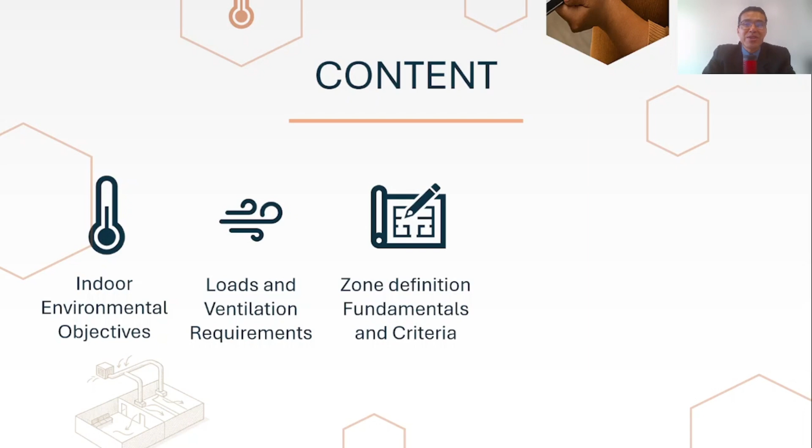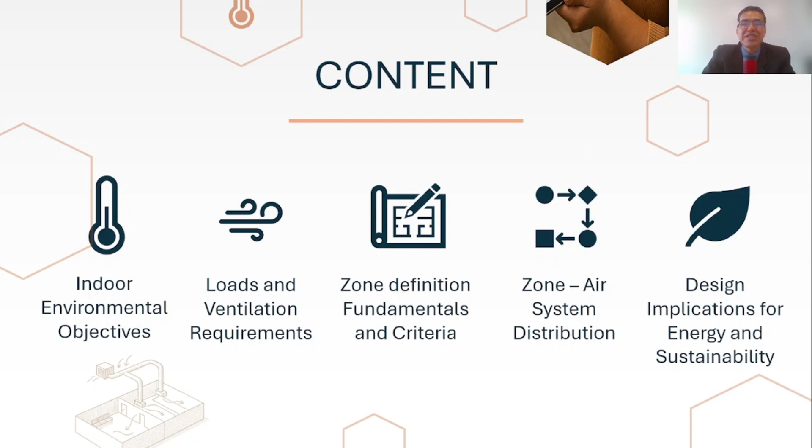Then we connect zones to system behaviors such as constant volume and variable air volume control at a conceptual level. And finally, we tie these choices to energy and sustainability outcomes that matter in practice. The learning objectives. By the end of this video, you should be able to state why HVAC systems exist and how zone definition supports both comfort and indoor air quality.

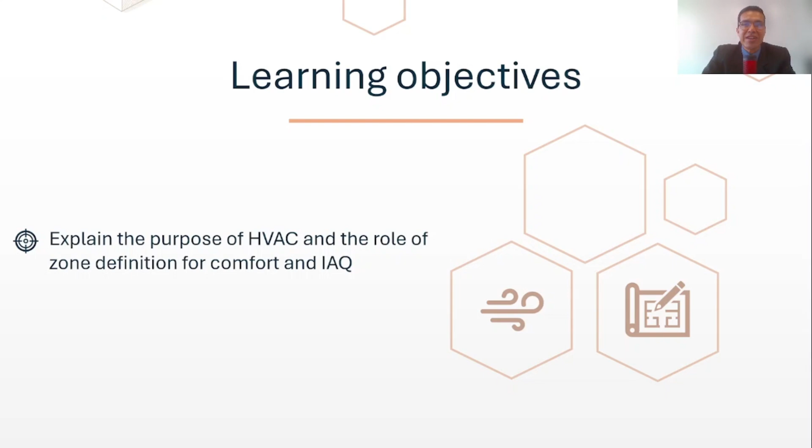Let's start with a question. Imagine that you are handed a design that says a single air handler with one thermostat serving an entire floor that has rooms with different uses. What mismatches might emerge between what the system delivers and what different spaces actually need? Take a moment to picture three distinct areas: an open office with variable occupancy, enclosed meeting rooms with short high-density events, and a print or copy area with process heat and emissions.

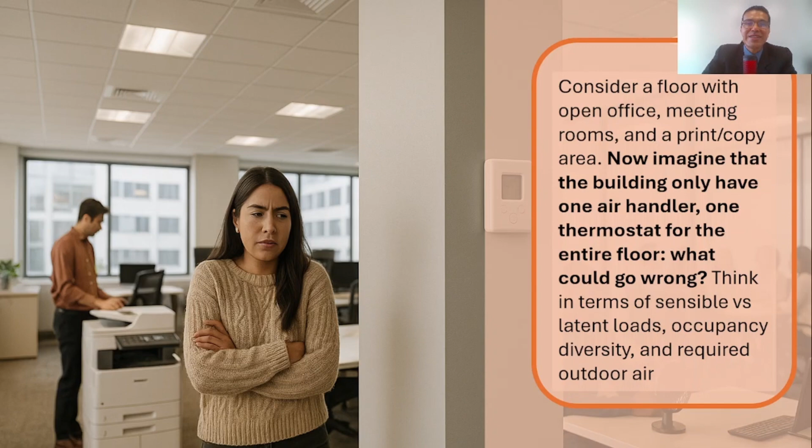If one control point is expected to keep all these areas comfortable, what happens when the conference room fills up while the open office empties? What happens to humidity control when the print area adds latent loads? As you think this through, separate sensible and latent effects, and remember that outdoor air is introduced for indoor air quality, not just temperature control. How should this diversity influence the performance of the air handler for the whole floor? Keep your answers in mind.

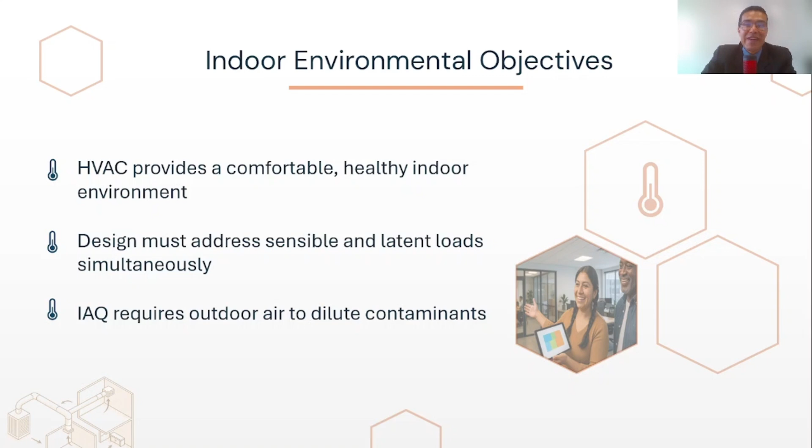So let's start with indoor environmental objectives. The primary purpose of HVAC is to create indoor conditions that are comfortable for occupants and supportive of health. This requires offsetting both sensible loads associated with temperature change and latent loads associated with moisture removal or addition under expected operating conditions. In parallel, outdoor air is supplied to maintain indoor air quality by diluting contaminants from people and processes. The system must therefore condition and distribute air to satisfy both thermal and indoor air quality objectives.

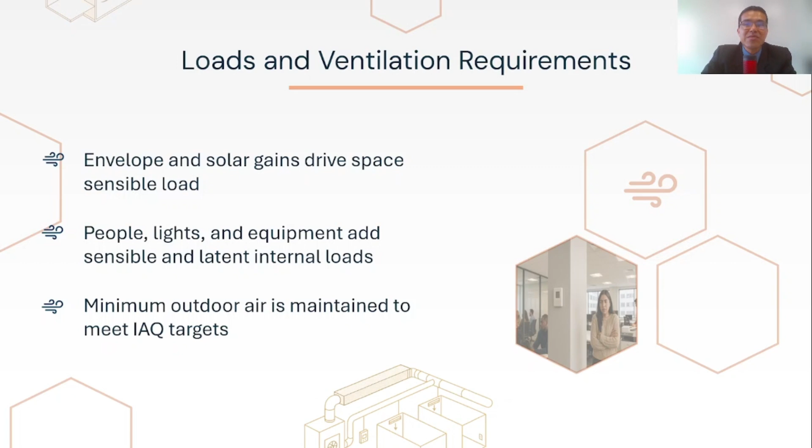Then let's talk about loads and ventilation requirements. Building envelope characteristics and solar exposure determine a substantial share of the sensible load that the air side must remove. Internal sources, occupants, lighting, and equipment contribute both sensible gains and, in many cases, latent loads that the coil and air distribution must handle. To meet indoor air quality, the system maintains a minimum outdoor airflow mixed with return air. That minimum must be provided even during part load conditions, which has direct implications for control design.

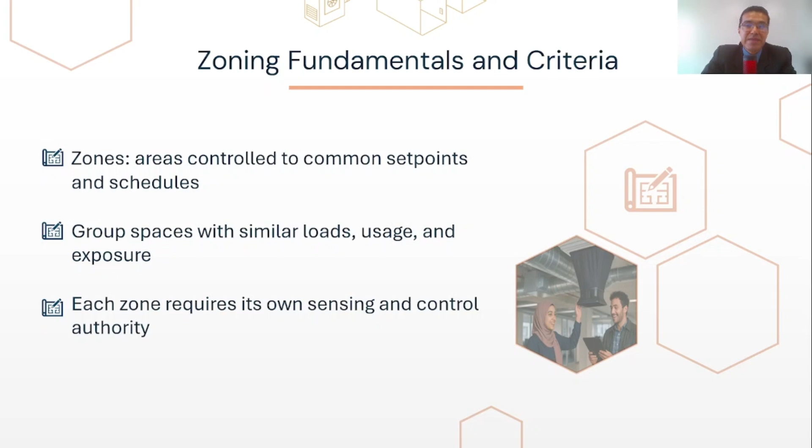Now let's talk zoning fundamentals and criteria. A zone is a portion of the building that shares set points and operational schedules, so a single control signal can represent its needs. Effective zone design groups spaces that exhibit similar internal gains, occupancy patterns, and envelope exposures. This limits cross-interference where one space's needs compromise another's. Practically, each zone should have sensing, a control point, and a means for the system to adjust delivered conditions, like airflow, temperature, or both, independently of other zones.

Now let's talk about the air system distribution in a zone. In constant air volume systems, supply flow is essentially fixed and the system meets varying loads by changing supply temperature, often introducing reheat at part load to avoid overcooling. In variable air volume systems, terminals modulate airflow to match sensible loads while maintaining a minimum flow to satisfy ventilation and air movement needs. The benefits of zone designs are realized only if the chosen system can vary delivery to each zone in a controlled way. Otherwise, zones compete for limited control authority.

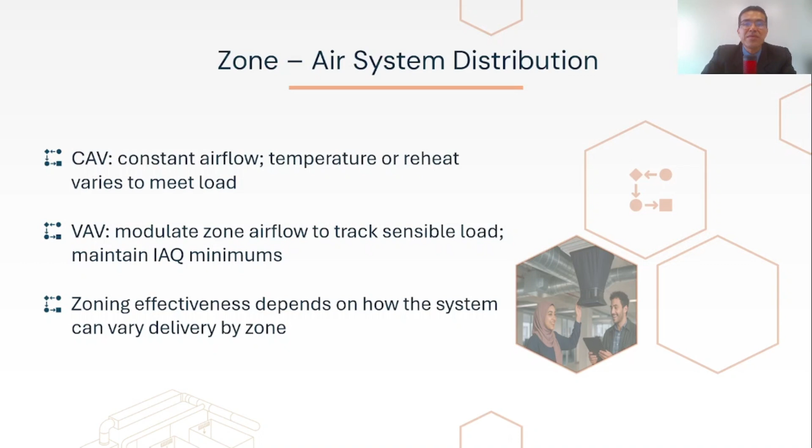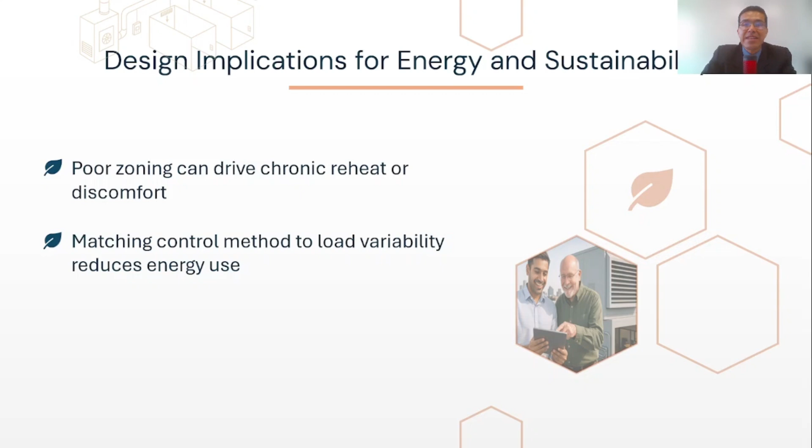Some design implications for energy and sustainability: when zones are poorly defined, one area's needs may force conditions that require reheat or that cause discomfort elsewhere. Aligning the control approach, which could mean choosing between constant volume with reheat versus variable airflow, with expected load variability can materially reduce cooling and reheat energy over typical operating hours. Early decisions should consider maintenance access and likely changes in occupancy or use so zones and systems remain effective over time.

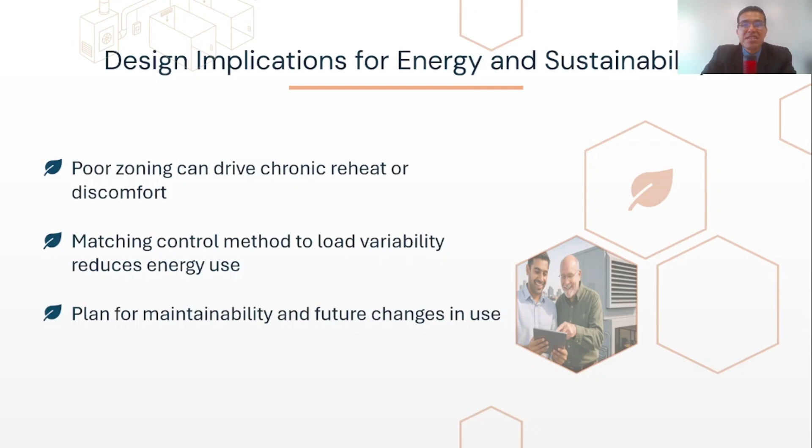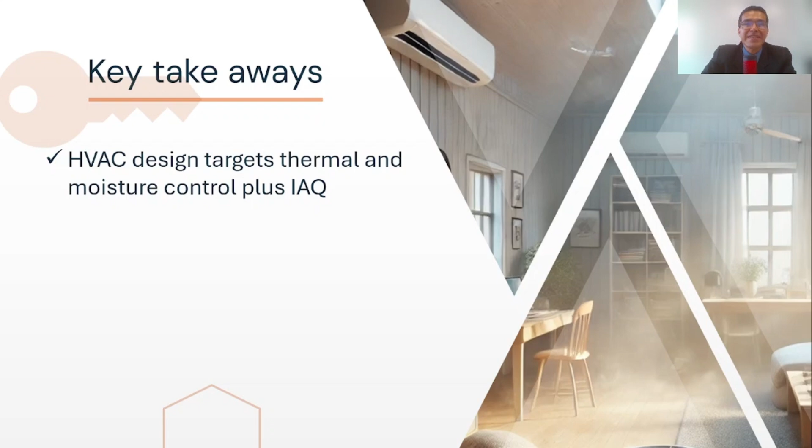So let's recap and mention some key takeaways from this video. Successful designs address temperature and humidity alongside ventilation. Zone design is the lever that makes control precise and fair across diverse spaces. So you should choose architectures that can actually deliver different conditions to different zones.

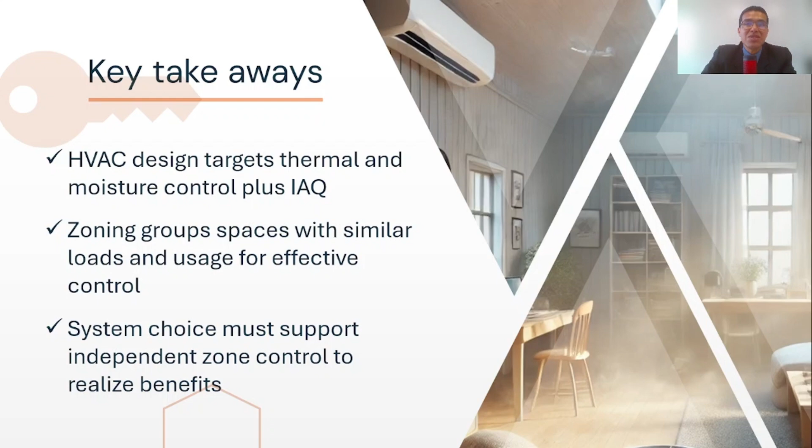So I invite you to continue learning about these topics. If you want to go deeper, study how the state points define coil performance and dehumidification under summer design. Explore how part load behavior differs between constant and variable airflow approaches and why that matters for energy. Finally, I suggest you review control sequences that preserve minimum outdoor air across operating conditions.